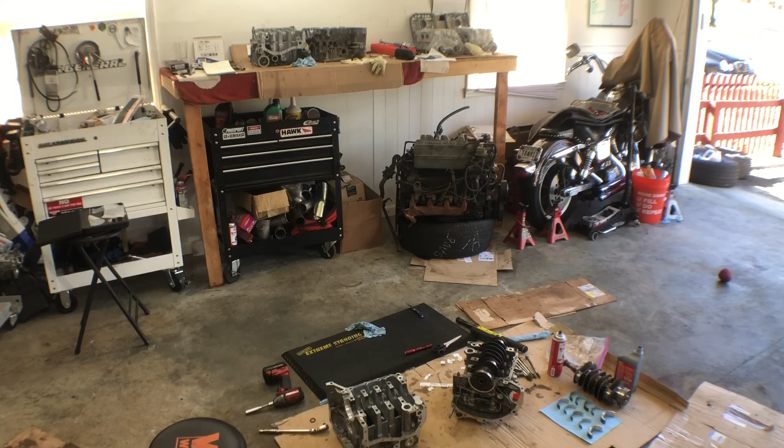Basically, I got these King bearings, some .026 and some standard. I thought I actually ended up getting the standard X, but ended up getting the .026, which is a tighter bearing. Ended up working out in the long run because I believe the case halves we sent to the machine shop are a little on the loose side as far as the bores for the crank.

We had this other bad crank and these other 2.5 case halves. I ended up plastic gauging a lot of different combinations - the old case halves with the old crank, and I believe these are OEM bearings. Everything came out a little on the loose side.

About 1.6 thousandths. Ended up putting the good crank in here with those OEM bearings, got similar numbers. Ended up putting the .026 bearings in these case halves with our good crank that went to the machine shop, and we got slightly tighter tolerances. So I believe the OEM bearings are just a little on the loose side.

So I think what we're gonna end up running is the .026 bearings. We'll go ahead and show a little bit of the plastic gauge process and maybe a little bit of my mess up on the dial bore gauge - just couldn't get it dialed in properly.

I think it's mostly due to the Harbor Freight micrometer. There's just a high spot on the anvils, and I can't get that exact high spot centered on the dial bore gauge to get it zeroed out. So let's see what happens.

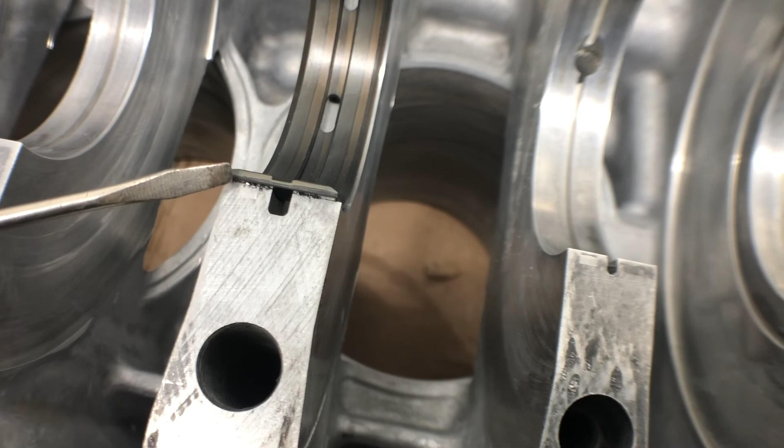I don't know if you can see, but there's a little bit of stuff coming off the bearing. So I'm gonna pop it back out, and maybe we're gonna have to wipe all these down just to double check them.

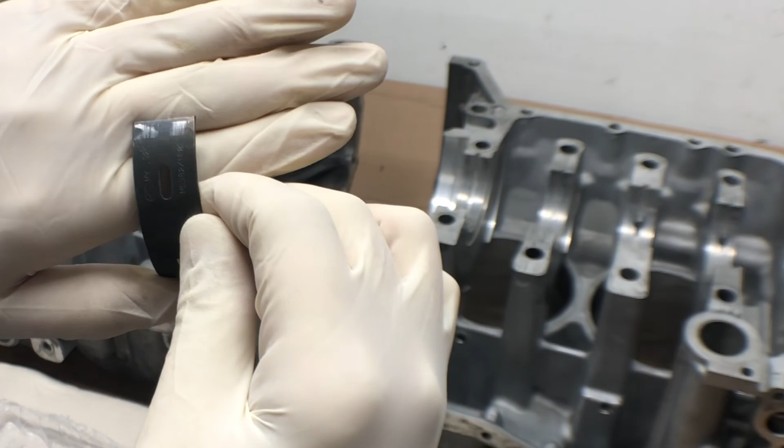All right, so mine already messed up. Got a couple little marks on the bearing from the first attempt. Not quite sure how else to pop it in without that happening.

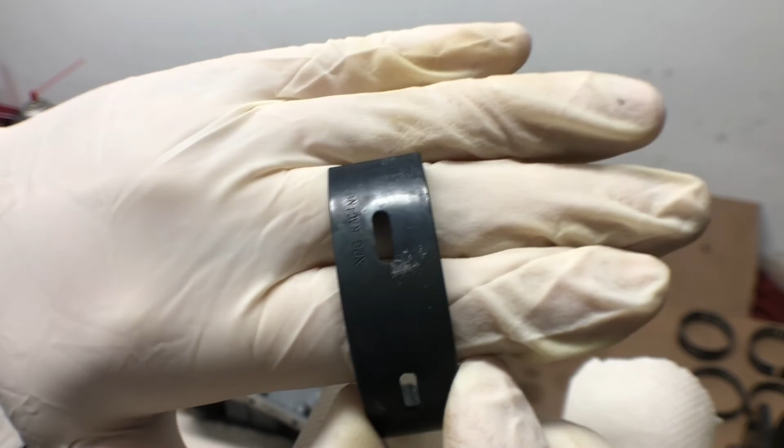So which one is that, number 3? Let's see if I can do this one. I'll wipe this one down. I haven't even put this one in yet, and it's got some interesting marks right there by that oil hole. I don't know if that's coming up on camera - that's just the way it came in the package. So this one's in the middle, we'll have to...

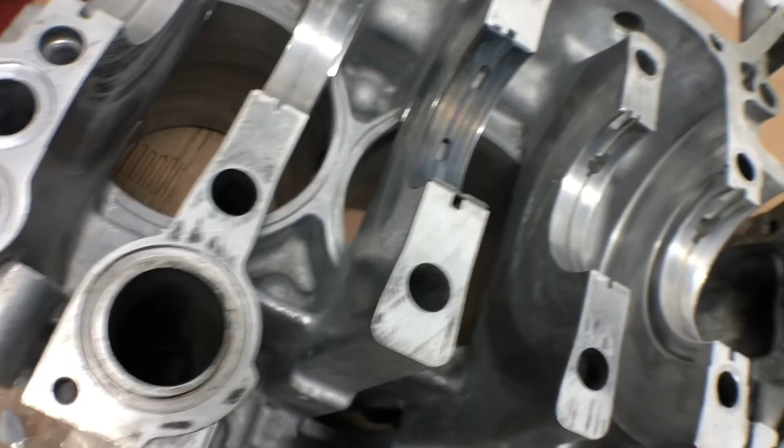All right, so first bearing in, interesting experience. We did have a little bit of scraping on the outside of the case half right there - just wiped off, I don't know if that's paint or just a coating. Same thing over here, there was a little imperfection on the back of the bearing. Not too worried about that, but they're both in that center main.

All right, got the number 5 thrust bearing. There is a little bit of residue or something - it almost looks like surface rust in there. There's no locating tabs, little notches - some weird thing I guess King does. But I am just gonna keep them in the same orientation as all the other bearings.

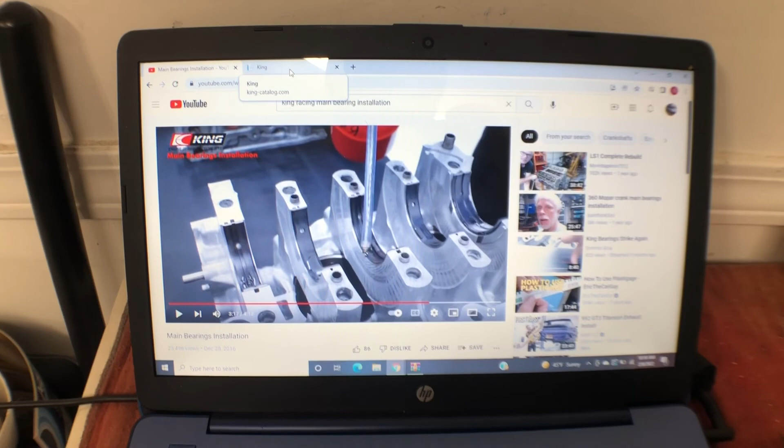That's why I put that first one in the third main right there. I just wanted to double check some stuff, so I watched a couple of videos on YouTube to make sure everything's going right. You can go to king-catalog.com, put in your part number, and it will pull up a parts list. We select that one at the top, and it gives you the locations of all the bearings and their part numbers. So just double checking, make sure everything's correct.

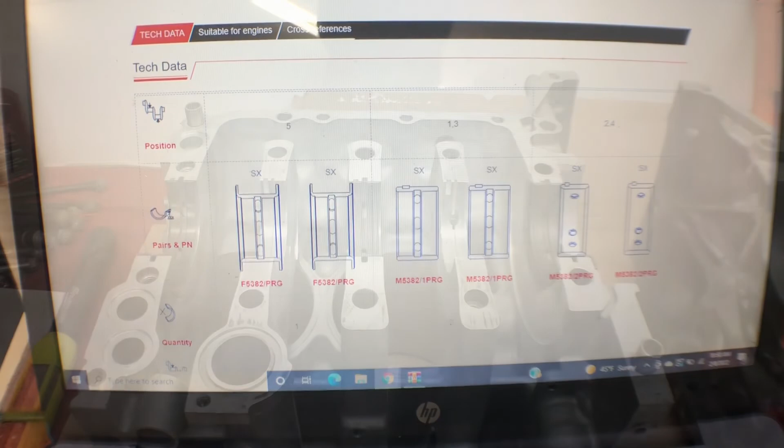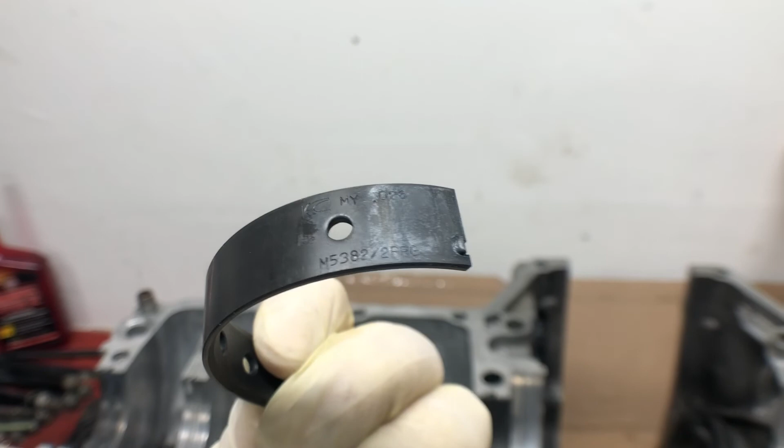So we've got 1, 3, and 5 installed. We've cleaned all those and put them in. I did double check and clean the case halves as well, just real quick. And then you can see right here, M5382/2PRG - so that's the 2 and 4 mains, and then the 1 PRG were 1 and 3, and obviously number 5 is the thrust bearing.

All right, this is the last bearing to go in. Everything's been cleaned before, and on that King racing video, they say you should be able to just press it down. I haven't had any other issues with any other debris coming off installing the rest of these bearings after I've cleaned them pretty well.

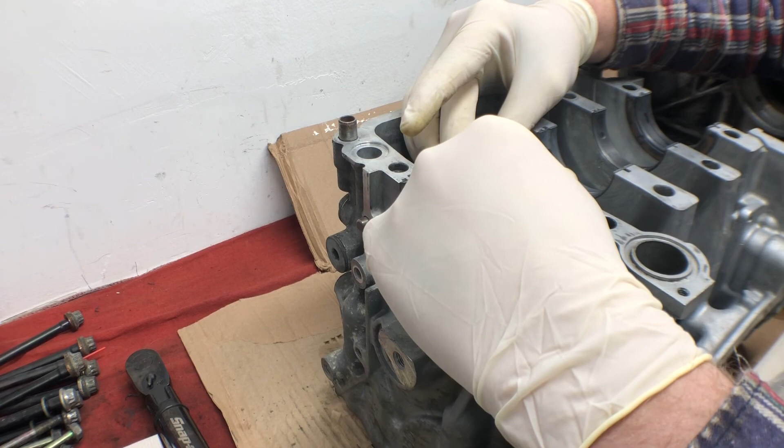What I've been doing is lining up one side with the groove and pressing inward while rolling my thumb down, and it's done a pretty good job. All right, everything's marginally clean.

We're now going to put the crank into the right side case half. Need to be very careful to keep this aligned as possible, like I'm not doing right now. And then it must not spin or move at all once it's in. Finger's stuck in the back. I think it did go in fairly easy.

I did clean up the crank one more time before I placed it in. So now what I'm going to do is pick up the crank and rotate it slightly so that these oil holes are not facing upwards, because that's where I want to put my Plastigage. So let's lift it up. Oh, wasn't even all the way in. Oh, thank you, let's try this.

Okay, and because we're just doing the Plastigage, there's no assembly lube or anything. That's why we're not spinning the crank. And I won't be putting in any O-rings or any sealant, and that's also why the rods aren't installed yet. Plastigage.

All right, I believe in the assembly instructions somewhere it did say to oil the locating pins. Now I can see. It's still real difficult to see from this high up.

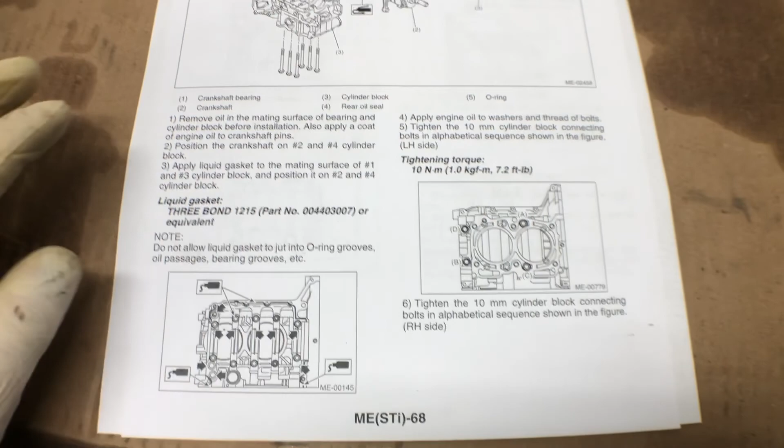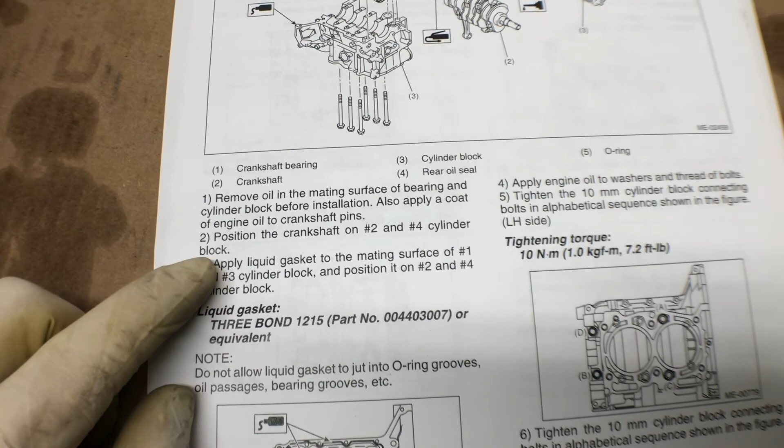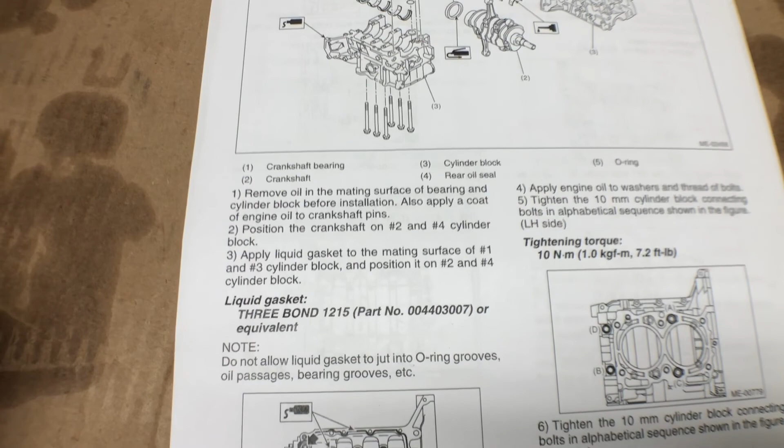Alright, pretty close, it's time for the bolts. Okay, we got our instructions here for the STI, Mo Power Baby. I found these online, the whole PDF FSM, so if I can find it again I'll put a link in the description. But it looks like, if you see number 2, position the crankshaft on number 2 and 4 cylinder block. I think I actually did it on number 1 and 3 cylinder block. I don't think it really matters, but I thought it would be the other way around so the O-rings wouldn't fall out. But we'll just follow the instructions here and the torque sequence.

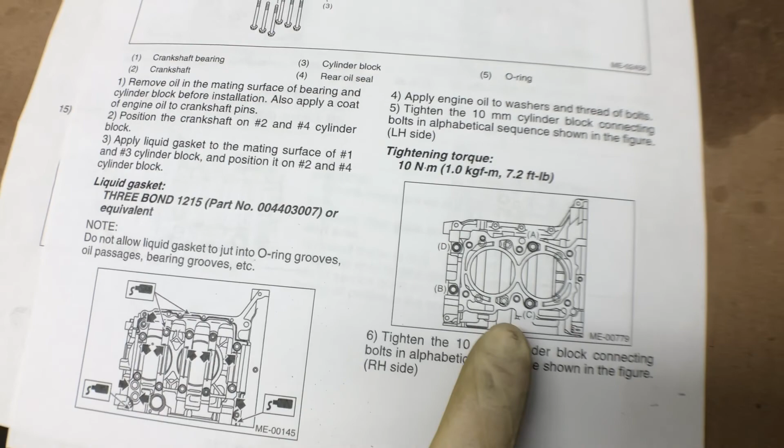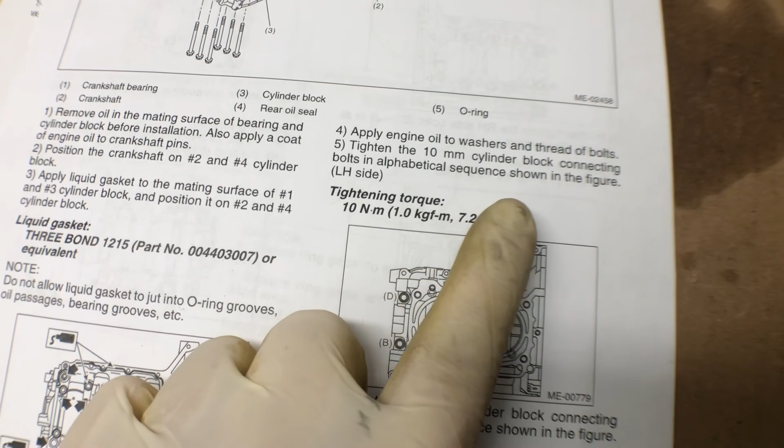And actually move the block to the ground, make it a little easier to work on and see. But now we're back on the left-hand side of the block, so you'd have to put the right-hand side on top of the left side, then flip it back over to this side to apply engine oil to the washers and threaded bolts, and tighten the 10mm cylinder block connecting bolts in the alphabetical sequence shown below, A, B, C, D. So we'll need 2 of the long ones with the sealing washers and 2 of the short ones.

Was it A, B, C, D? So then we're doing here A, what was it, B, C, and then D, right? Yeah, we got a 12mm, and we will start torquing these down to 10 Newton meters, in the alphabetical sequence of the FSM. So I don't know if that's good. Ooh, was it A, B, C, D? So A, ooh, B, ooh, C.

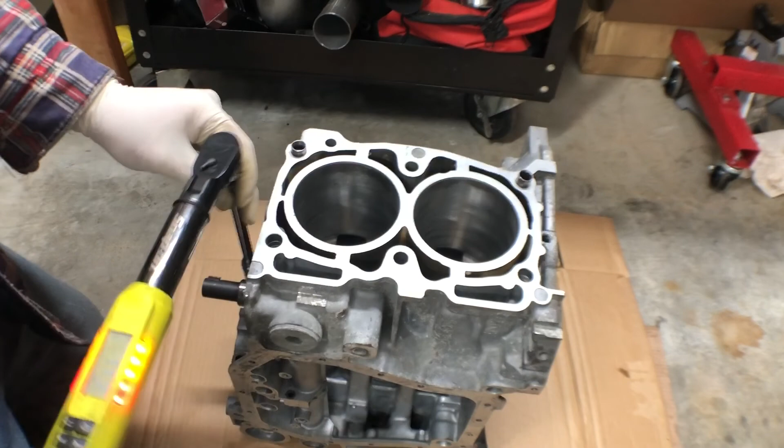10 Newton meters. Whoa, way too much. A, B, C. Oh, you know what I didn't do? I didn't oil these. Alright, attempt number 2, I did oil the threads and the washers. That's what it says to do in the manual, so that's what we'll do. Let's try this again. Whoa.

Let me double check, make sure this is Newton meters. Newton meters, 10 Newton meters. Found some random batteries in a drawer. Looks like they're still dead, but less dead than the other ones. Alright, 10 Newton meters. 10.

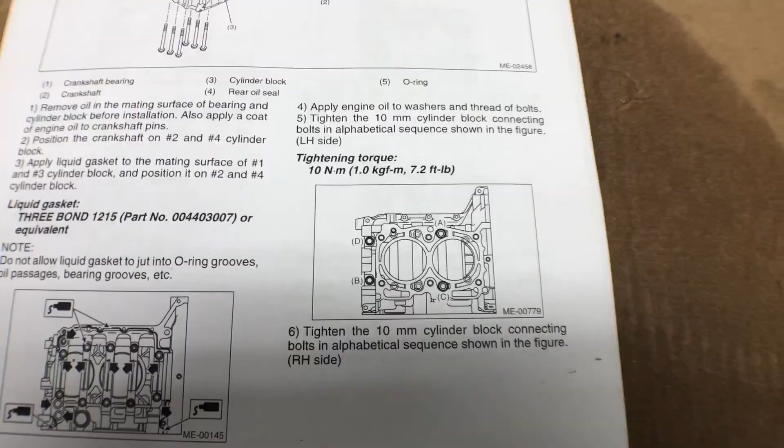10, 10. Alright, we got those tighten 10mm cylinder block connecting bolts now for the sequence shown as the right hand. They're just showing the left hand side in this picture, but they're showing the bolts from the right hand side, so you can see J's in the dotted circle. So was that A, B, C, D, E, F, G, H, I, J. So we're going to figure this out reversed on the other side.

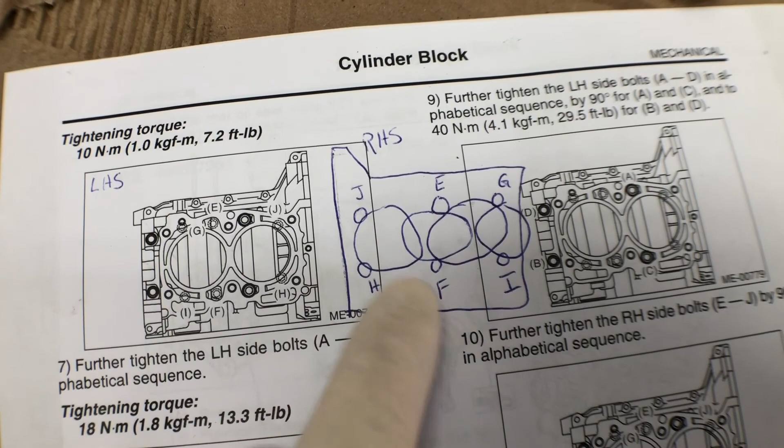Alright, to make this a little easier, I tried to mirror this image so that you're actually looking at it from the right side. So we should have 6 left over. You can see I actually messed up the cylinder holes. These are, what is this, 1 and 3? And so that would be 1 and 3 from the other side, but not from this side. It would be 2 and 4 over here, so I just kind of messed that up.

But let's see, A, B, C, D, E, F, G, H, I, J. So there's E, F, what is it, G, H, I, J. Is that how it went? E, F, G up top, H, I, J. But anyway, we got 6 left over, the 6 bolts. The 2 without the sealing washers will go where it doesn't need a seal, right there. So, alright, E top middle sealing washer, F bottom middle sealing washer, G top right sealing washer, H outside bottom left no sealing washer, I bottom right sealing washer, J top left no sealing washer.

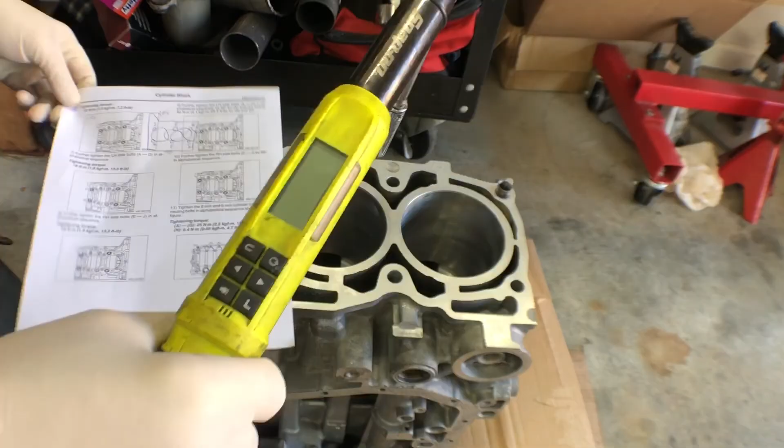Was it E, F, G, H, I, J. I think that's right, 10 Newton meters again, with a dead battery.

E, F, G, H, I, J. What's next? Number 7, further tighten the left-hand side bolts A through D in alphabetical sequence to 18 Newton meters. We'll bump it up to 18 and look at this again. A, 18. B, 18. C, 18. D, 18. Number 8, further tighten right hand E to J to 18.

So let's flip it back over. Alright, what is this, the right hand side? 18 Newton meters. E, F, G, H, I, J. What are we on now?

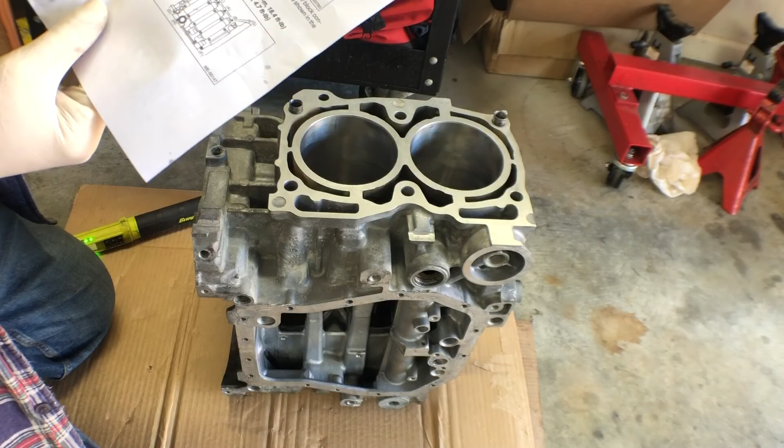Right hand side 18, left hand side by 90 degrees for A and C, and 40 Newton meters for B and D. Interesting, 90 degrees. So now we gotta go back to Newton meters up to 40 for B. Alright, back to degrees for C, 90 degrees.

Essentially this was right about 41 Newton meters. It does give you the Newton meter value after you degree it. 40 Newton meters, so I think we're good on the left hand. So we're back on the right hand side of the block, passenger side, and all of these are 90 degrees, 40 Newton meters.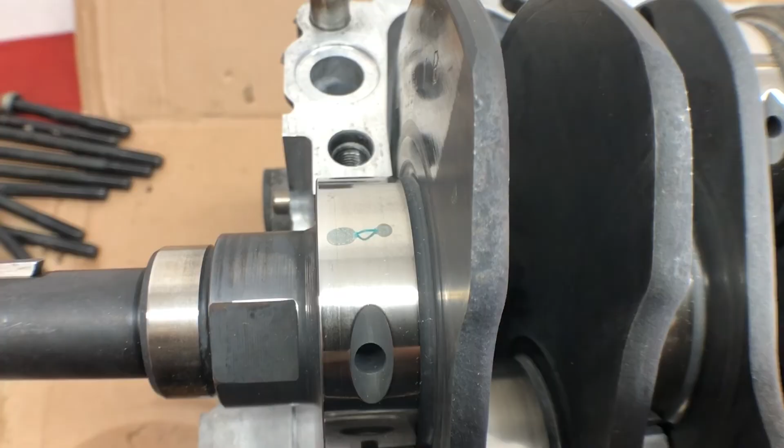What's loose? I just hit the crank. Alright, here's the plastic gauge. You can see that one little part in the middle is from the gap in the bearing. But these are the, that one fell, I guess, when I was putting it together. That one, there we go.

So let's measure. Alright, so let's check this first one. We're looking in millimeters right here, and it looks like it could be anywhere between 0.025 millimeters and 0.038. The plastic gauge is bigger than the 0.038 indicator measurement, and actually it might be right on the 0.025. Let's check the rest of these.

Alright, just gonna do a quick rundown comparing. This one looks like it's between 0.025 and 0.038. This one actually looks a little bit looser. I guess this is number 2, between 0.038, it's just a little bit smaller than 0.038 and just a little bit bigger than 0.051.

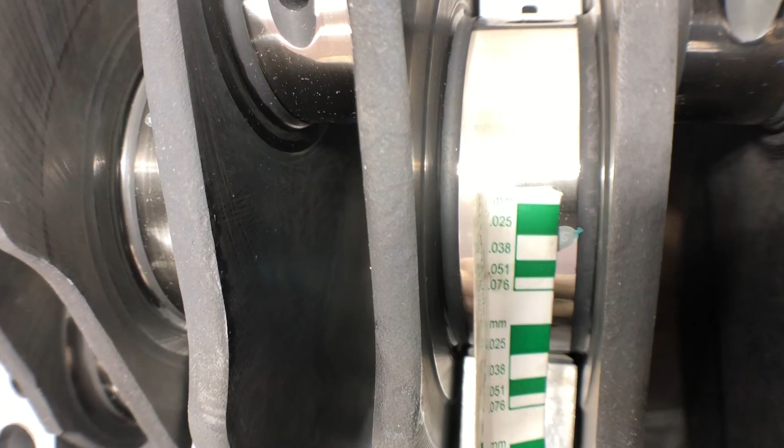This is number 3, we kind of missed this one. Somewhere around the 0.038, smaller than 0.051. So probably somewhere around the 0.038 measurement. This is what, number 4.

This one also is pretty loose, looks like maybe about 0.051, definitely not 0.038. And then number 5, the thrust bearing, 0.038, pretty close. Yeah, probably pretty close between 0.038 and 0.025.

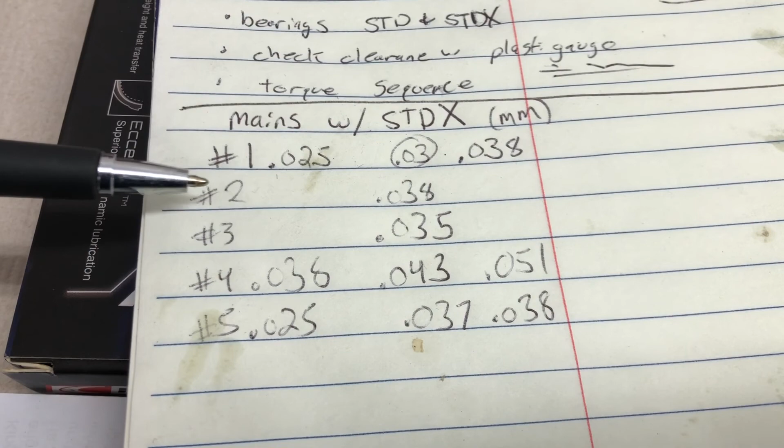I might write these measurements down, just to get a better idea of where they're at, and then we'll compare those to some other research that I've done to see what people are running. So these obviously aren't accurate measurements, they're just ballpark ideas of what we've got, but I just tried to get an estimate of what it was in between the two values on the plastic gauge, and came down here. Number 2 and number 4 were both a little on the loose side. Everything else was pretty close to the 0.038 mark on the plastic gauge.

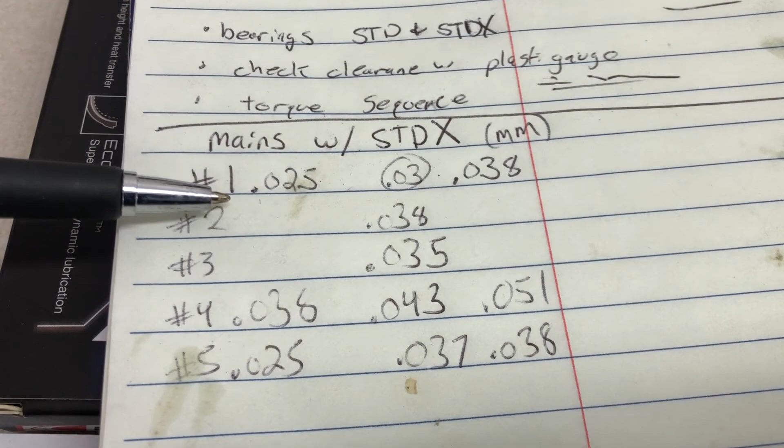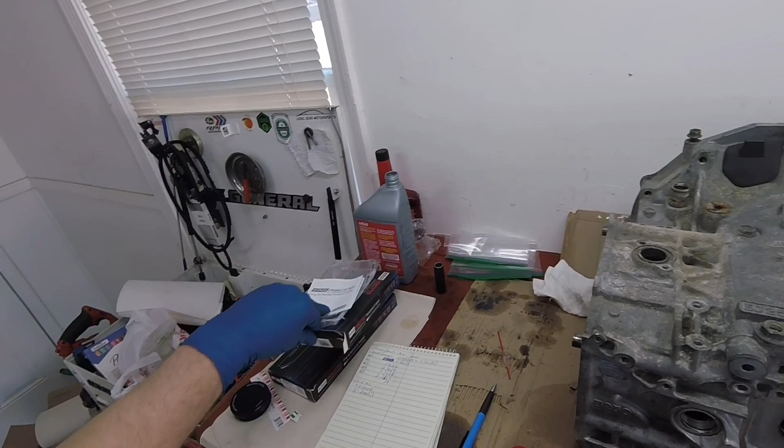Alright, here we are, still working on this, torqued this together 100 times trying to get the bearing clearances somewhere within spec. Actually ended up ordering the wrong bearings. I was trying to order a looser bearing, which would be the standard, but under Rally Sport Direct's website, when you select the oversized bearing, the undersized bearing actually comes up, which is the 0.026. Which is actually what we have in here right now without the crank. I had these tighter bearings in, and the tolerances were a little on the loose side. I put the standard bearings in, and using Plastigauge, I found the tolerances to be even looser.

So now I broke down and actually bought a micrometer set and a dial bore gauge, and we're just going to triple check these measurements to see what we got. So starting out, I'm just zeroing out the mic.

I measured this 2-inch stock, and we got about 2.0005 of an inch. So we're off by half a thousandth.

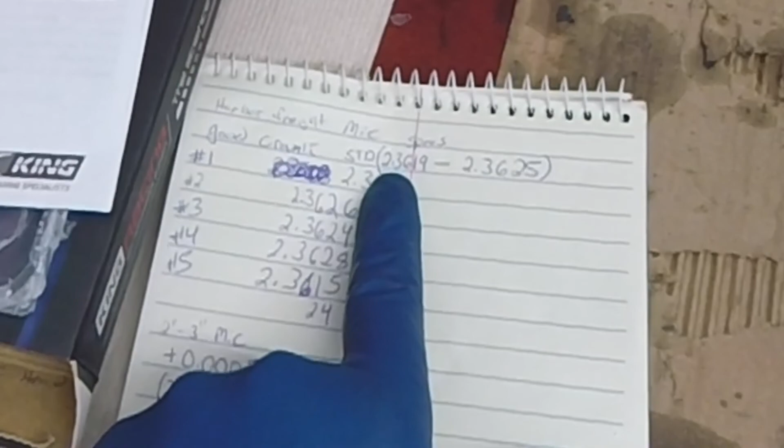I did take some preliminary measurements of the crank journals. I believe this is the standard spec, 2.3619 to 2.3625 inches. If you look at these initial measurements I took, they all look to be pretty close.

If we consider this to be half a thousandth off, so minus 0.0005 from each of these, that would be 2.3626, so right on the top end spec. This would be right above the bottom end spec. This would be actually right at the bottom end spec. And this would be right in the middle.

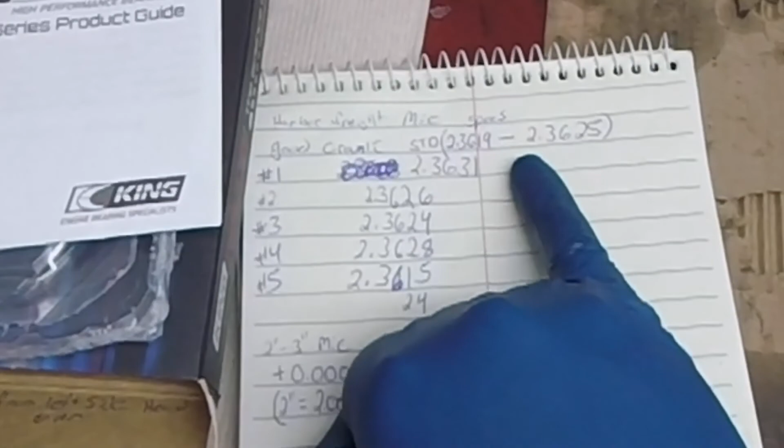And then I measured number 5 twice. I don't think I got an accurate measurement. I might have torqued it down too tight, but if you look here, that would be right at the bottom spec. So it looks like our crank is within spec.

That would lead me to believe that the bore between the case halves might be a little loose. So we're going to double check it. We're going to measure each journal, set up the dial bore gauge with the mic, and see if we can see our clearances.

Alright, so I got the dial indicator set up, got the dial in the end, selected this 2.4 anvil, slightly bigger than our 2.3 bore that we're looking for. Now we're going to measure each bore in comparison to the journal and the crank.

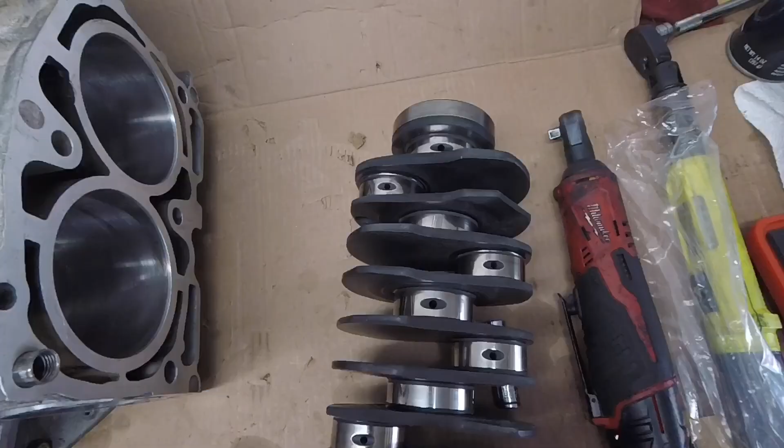So this is number 1 from the engine, number 1 from the crank. Let's see if we can measure something here very gently. Not sure if y'all can see anything on the GoPro. Right there, clicked a couple times, measure a couple different spots, just a tiny amount of drag.

We could probably even tighten this just a pinch more. Nope, so let's measure this. This little thing locks it down. Double check, see if we matched our first measurement.

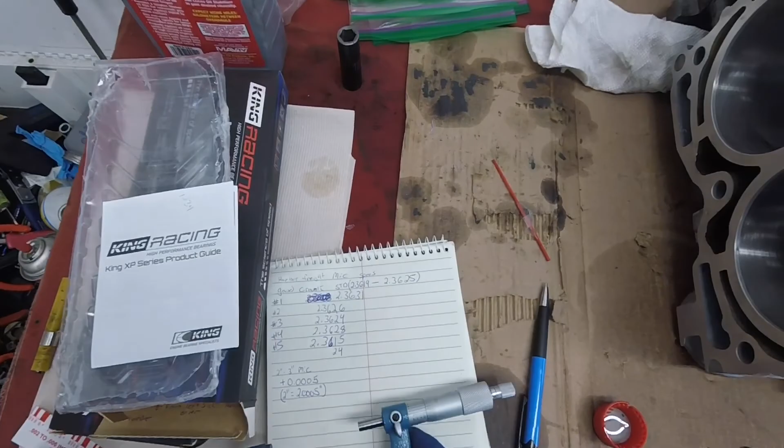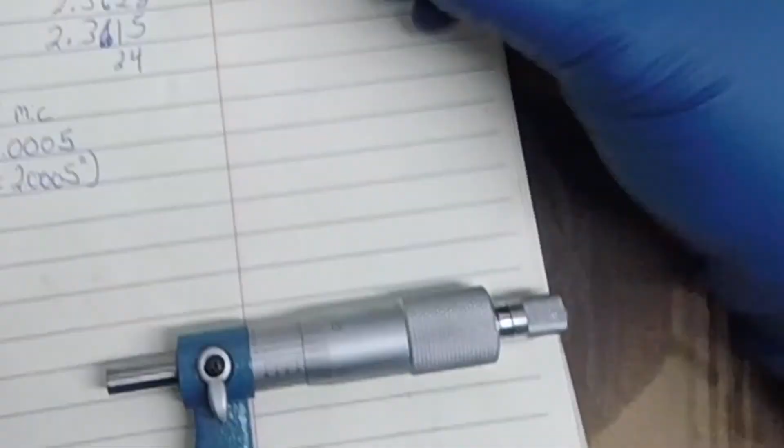So we got 2.123, and then you can see 1, 2 graduations. So let's just write this down. We've got 2 inches, 0.123, and then there's 2 graduations. That would be 0.025, 0.050 plus whatever's on here. So that's 10, 11, 12. So 50 plus 12 is 62.

And then we find whatever one matches up here. It looks actually like that. Actually, it might look like 13 lines right up. I might call this 3, 0.

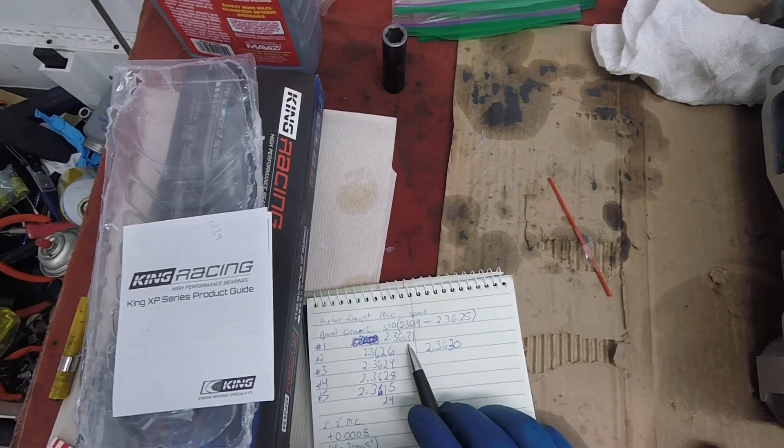Okay, so I actually wrote it on the wrong line. But my first measurement was 2.3631. This measurement came out to 2.3630. And if we account for the 0.0005 difference, we bring that down, it would be right at the top end of the spec. That should be right here. Let's cross this out, 2.3630. And then we just subtract that, so this first journal should be dead on the crank.

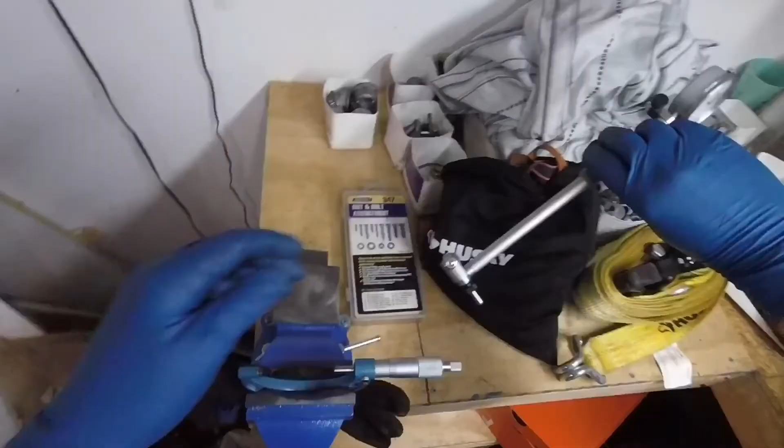Now we need to zero this bore gauge out. There we go. So trying to rest my hand on the bench vise here and trying to center this as best I can. We're moving it around as much as we can. We're right about, what is that, 5 to 6 thousandths max. So that will be our 0 point. So let's do this.

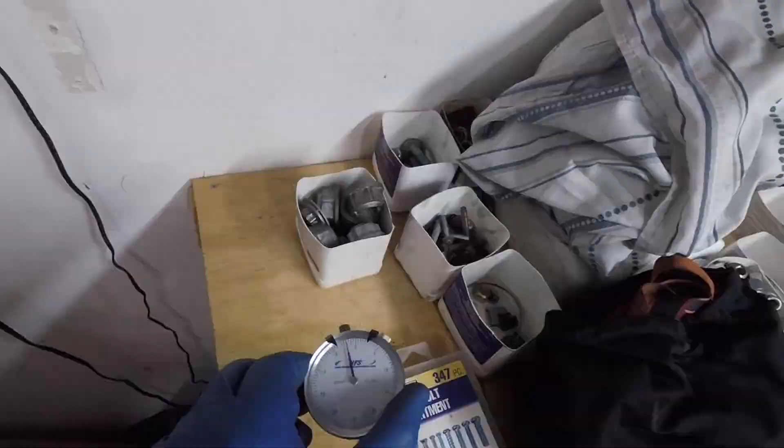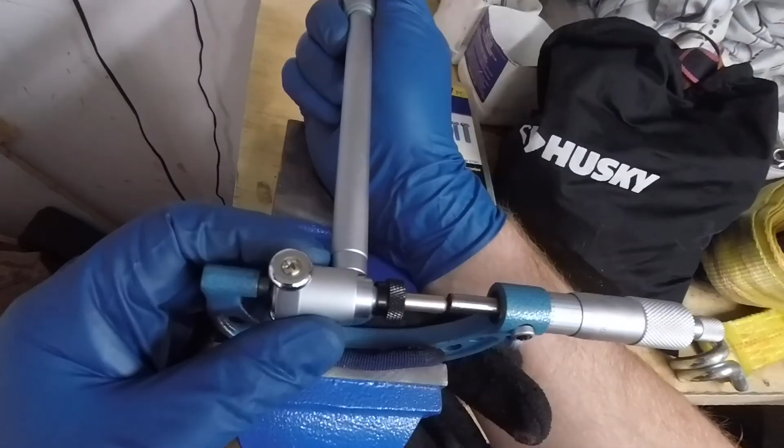That or micrometer might be slightly off. Not 100% square on this little anvil side and the moving side, because I'm over here on the top end, I'm like right over 0. But as soon as I go down to this bottom side, oh no, I'm still pretty close. Maybe a thousandth. I think there's like a half thousandth between the mic. This is why you need to buy good tools.

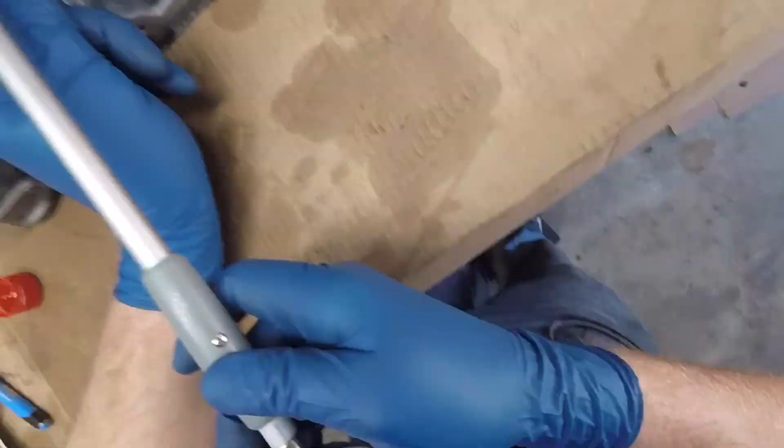Let's go by the short end of the mic. See, even on the bottom, we're still getting pretty close to 0. Just got close right there. I don't know if you can see this, but the max we're getting is 2 tick marks on this gauge. So we need to determine what 2 tick marks mean.

Real quick, little issue I'm running into here. When I tried to zero this out, it was half a thousandth off. And if you look closely, I don't know if you can tell, but this part that spins, the barrel or whatever, is slightly at an angle. It's just not precise. You can see there's our half thousandth too big, and we can roll this in the measuring point. You can see there's that high point right there at the top. So we can roll it all the way in. It's almost at like the top, back is just a little tight point. So when I'm trying to zero out the dial bore gauge, there's about, I don't know, maybe half a thousandth to a thousandth difference between this tight end and the loose end.

So I'm going to try and measure the journal one more time on this tight end and zero it out with the dial bore gauge, and we'll see what we can find. Maybe we'll swap this micrometer out for another Harbor Freight bullshit one.

All right, I've zeroed out the dial bore gauge after remeasuring the first journal on the crank with the mic. I did it at the loosest setting possible, which still turned out to be about 2.3635 inches. If you account for that 0.0005 difference, it's about half a thousandth over the spec.

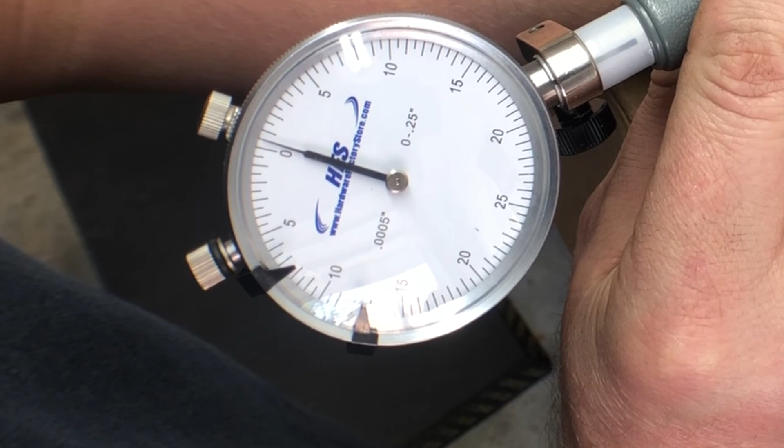And then we will just see what our dial bore gauge says. I'm going to compress it in there, rotate it up, try and move it around a little bit. So if you can see on this gauge, 0 is the crank journal, and then we come up, that's 0.5 thousandths, 1.5, a little over 1.5 thousandths. So let's say 1 point...

All right, smart people probably caught that, but if you look closely right here, as I compress the needle on the dial bore gauge, it gets closer to 0. So when you zero it out on the mic, that 0 point is the thickness of the journal. Anything to the left of that 0 would be a bigger measurement, or the inside diameter of the bearing. If you look closely in that video, the needle actually goes up to 0, passes 0, and then I'm measuring right here for the clearance. That would actually be a negative clearance, or an interference. Say, what is that, 1.7 thousandths? 0.0017.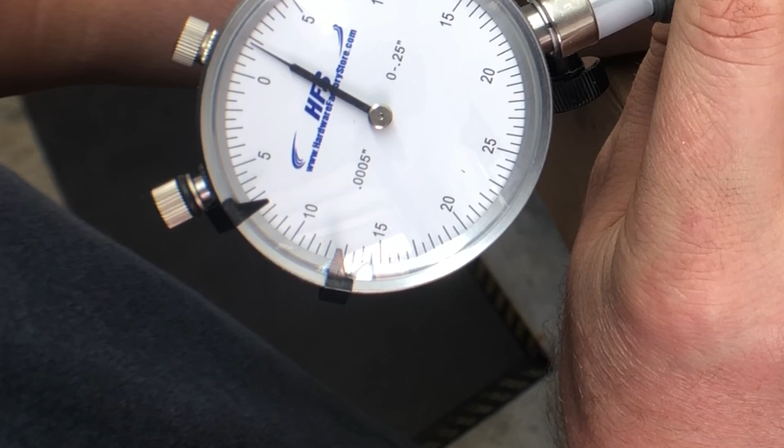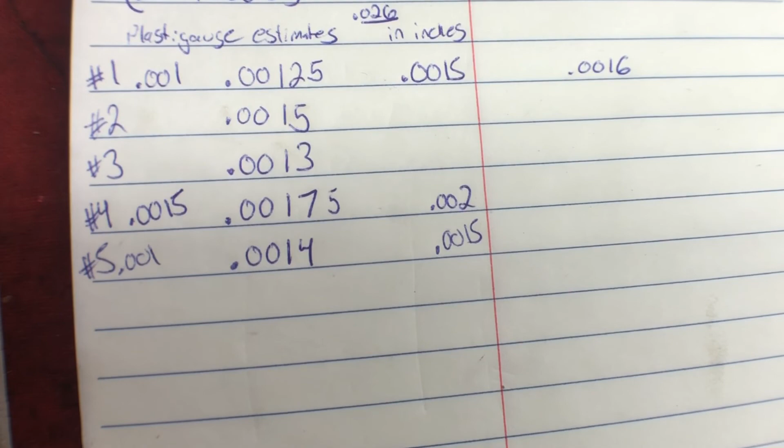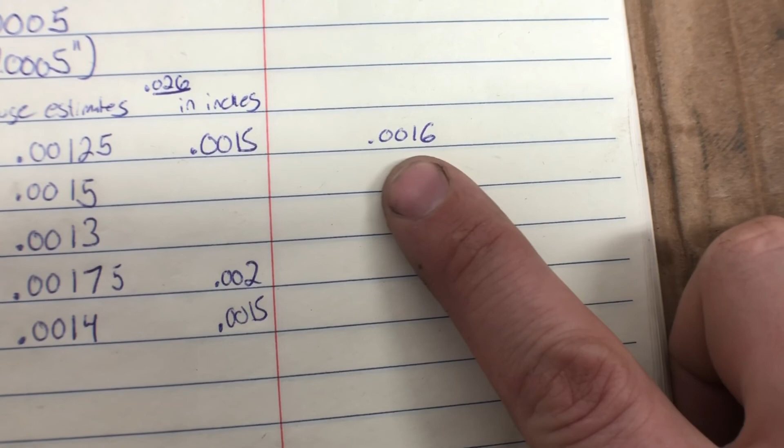So if we look over here, on the left side is my estimate from the plastic gauge. It was just in between the 0.001 and 0.0015 mark, so I just estimated it at that. And then you can see with the dial bore gauge and the bad mic that's not really accurate, we're getting somewhere close, right over 0.0015, 0.0016.

What is Rocky doing? Rocky, what are you doing over there? Are you stuck? Did you get trapped?

All right, so you can see here my initial measurements were in millimeters. Standard was like even further out. Actual journals on the crank, with the Harbor Freight mic, did come in very close. The plastic gauge estimates, I believe from the first time, just switched it to inches. This is with the .026 bearings. These were my first initial measurements.

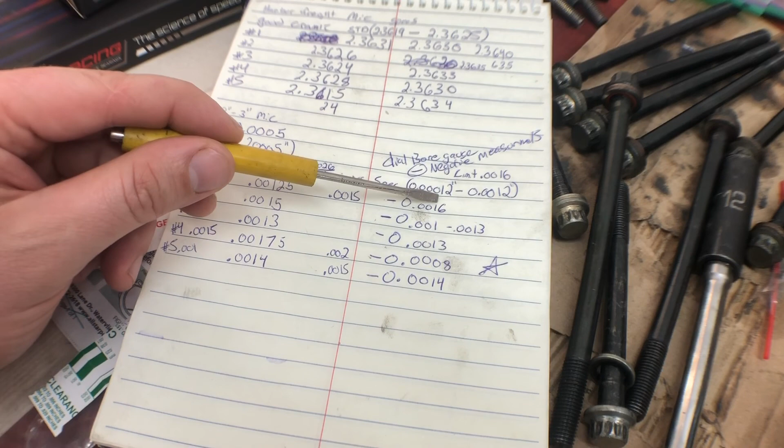You could see in that last little section of video where I got 1.6 thousandths. That was actually a negative measurement. All these are negative measurements. They were on the other side of the 0 on the dial bore gauge.

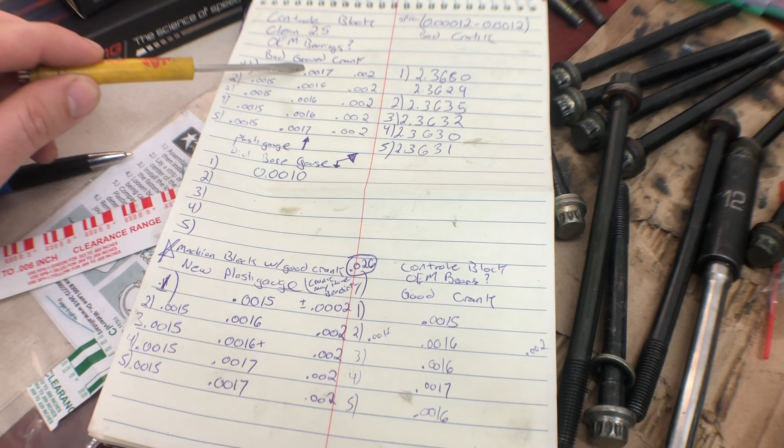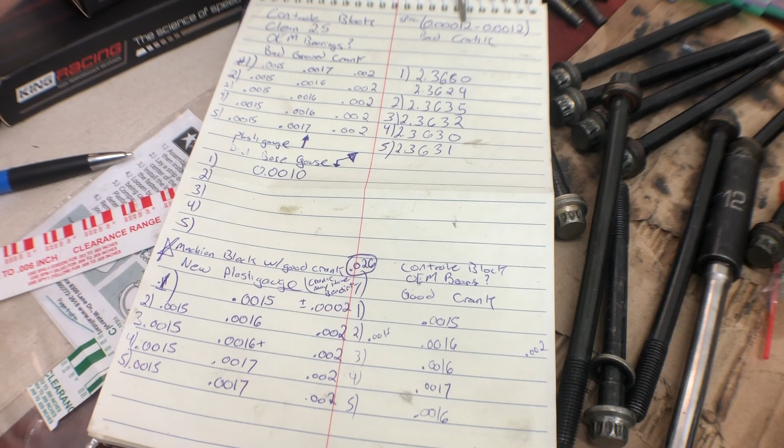All right, so this was the control block. That other 2.5 case halves I have, I believe those are OEM bearings in there, and these were the measurements I got. Now these are all a little bit on the outside of spec. You can see spec up here is 0.00012 to 0.0012, so we're looking for 0.0012 as the top end spec. I forgot what the limit was, but these are all on the top end of the spec.

Even with that other 2.5 case half and the other crank, this is the measurements from that other crank. They all came out really close to the crank that we have that we sent to the machine shop.

The machine block with the good crank, I re-plastic gauged it just to see if I could repeat the measurements, and it looks like a couple might have come in a little bit tighter, but you can see they all look about the same. We're comparing these two. These are both the .026 bearings with the good crank.

The plastic gauge I was using originally was really old, so I might have run over it with the little wheelie chair too. When I was testing it again, I actually pulled some out. It was all breaking apart, and just with the naked eye, some of the plastic gauge looked like it was different diameters. I ended up picking up some new plastic gauge and reconfirmed it.

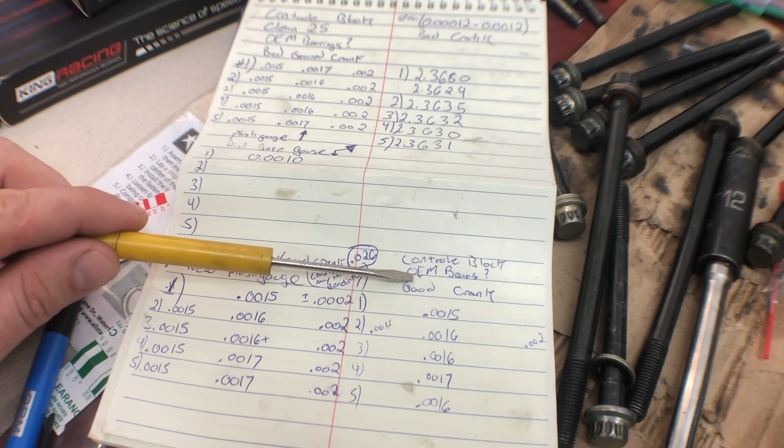This was the control block with those random bearings. I believe they're OEM, and our good machine crank, and you can see that our measurements are almost exactly the same, so that leads me to believe that there's no issue with the crank.

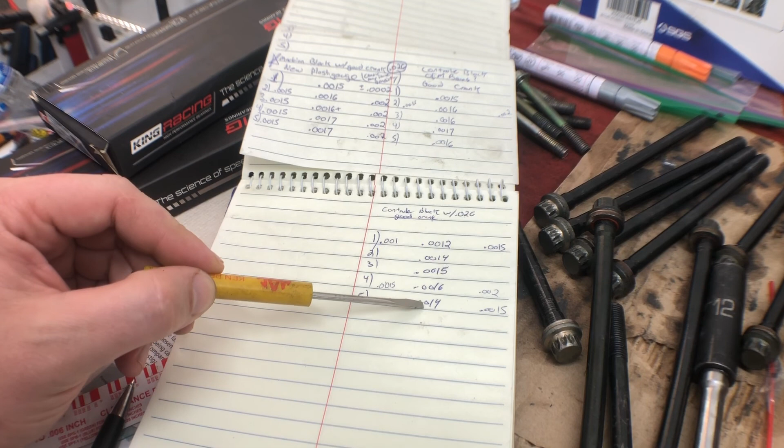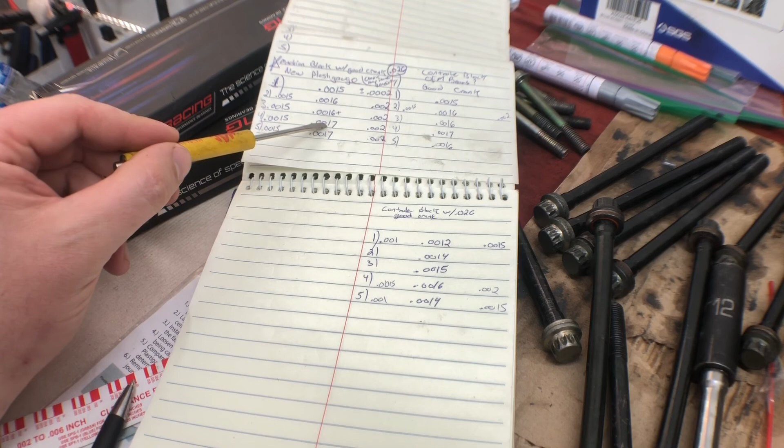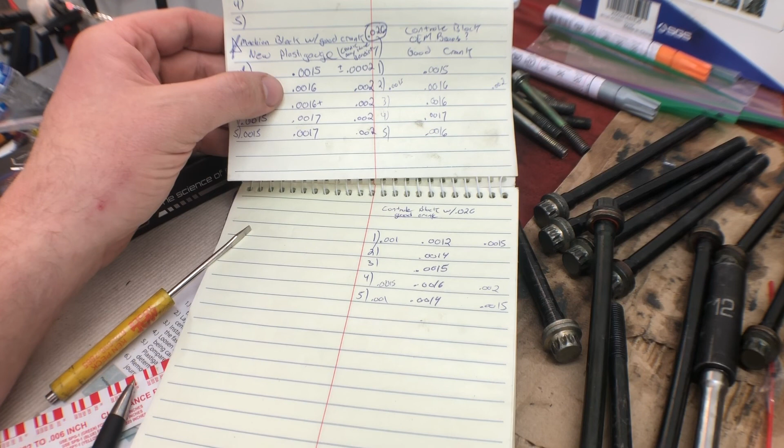I'll throw in a couple pictures or screenshots of bearing clearances that other people have run.